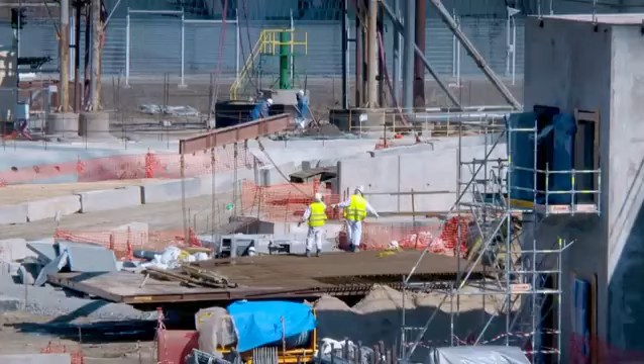Today, in Ukraine, an international team of engineers is racing to assemble one of the most complex superstructures ever built. It's the largest structure that will have moved on land, an extraordinary 36,000-ton, £1.2 billion megadome. Its job: to entomb the crumbling remains of the Chernobyl nuclear reactor.

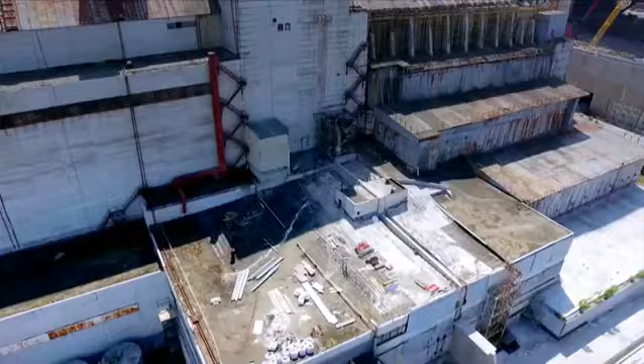The shell of the nuclear reactor is collapsing. Engineers must battle to stop another escape of deadly radiation. It's extremely dangerous - everything we touch, everything we do is completely crazy.

Fighting freezing weather and lethal radiation, this is the inside story of the race to build Chernobyl's mega-tomb.

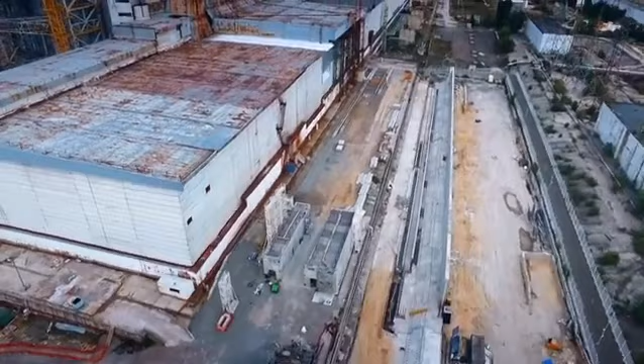These are the world's most uncomfortable boots, but I think they reserve these just for occasional visitors.

Simon Evans is one of the world's most unusual bankers. He's overseeing the funds for a project that will clean up and make safe one of the most deadly places on Earth: the Chernobyl nuclear power plant in Ukraine.

If you spend too long in some parts of this building, the radiation will kill you. Don't stop, don't stop.

We're in the control room of Reactor 4, where just over 30 years ago, they conducted a safety test on the 26th of April, 1986, and it went catastrophically wrong, and the consequences we're all too familiar with.

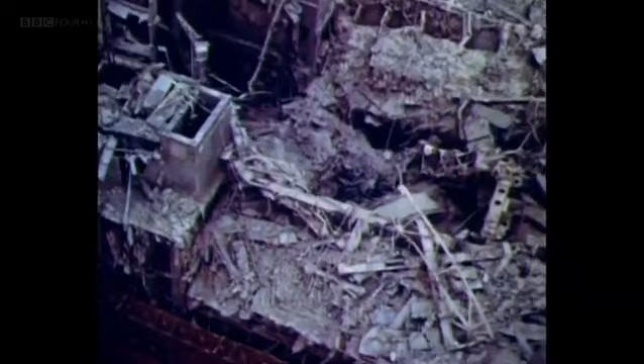At 1:23 in the morning, inside this Soviet-built reactor, a runaway nuclear reaction created a massive steam explosion. The blast killed 2 workers and blew radioactive uranium fuel onto nearby buildings. Radiation coming from this and the destroyed reactor killed a further 28 people.

Soviet authorities have been trying to downplay the incident, claiming that there are only 2 dead and only 150 injured. Reports coming out of the Soviet Union confirm that a cloud of deadly radiation is being released.

The explosion sent 50 tons of nuclear fuel high into the atmosphere. The wind blew it across Europe. Where it settled, it contaminated both the land and animals.

In the UK, sheep reared in parts of Wales and Cumbria were declared unfit for human consumption.

Close to the reactor, the radioactive fallout forced 250,000 people to evacuate their homes, never to return. It was, and remains, the world's worst ever nuclear disaster.

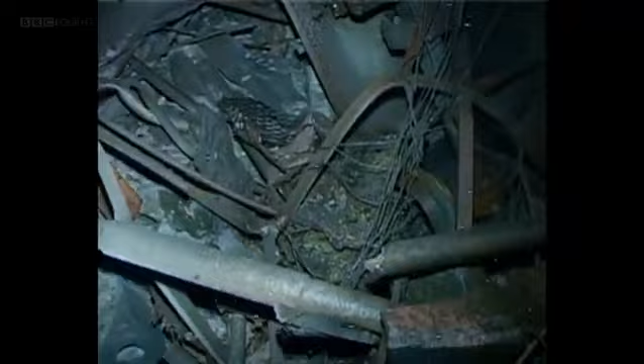After the dust settled, the Soviet authorities faced a monumental problem. Over 200 tons of radioactive material remained inside the damaged reactor building. Left unchecked, wind would blow the radioactive dust into the air.

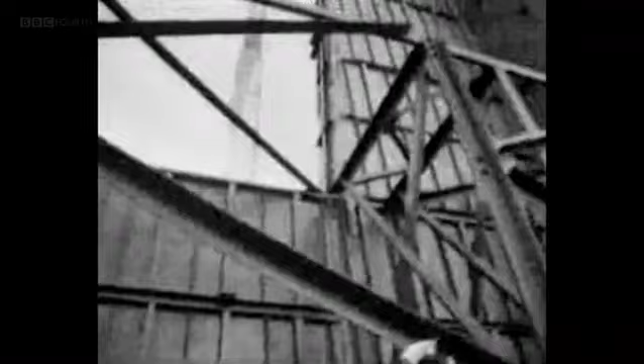Over the next 6 months, workers battled extreme radiation to seal the reactor inside a 300,000-ton shelter made from steel and concrete. It was called the sarcophagus.

Once it was complete, the world breathed a sigh of relief. Everything seemed safe.

But the engineers who built the sarcophagus knew it was a temporary fix. Today, 30 years after it was built, the shelter is falling apart.

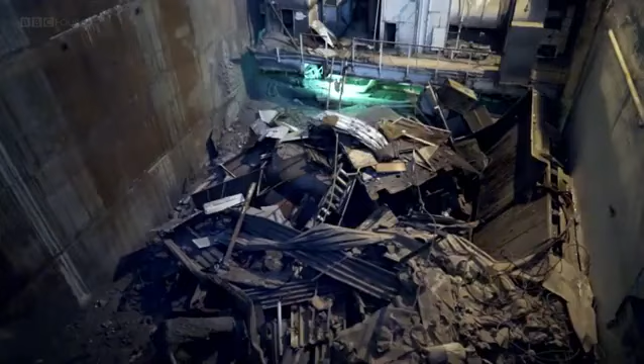This equipment monitors the stability of the existing shelter, which is absolutely essential to ensure that we know precisely what's going on here. We know that it's way beyond its design life. It's crumbling. We've already had a collapse from one part of the turbine hall about 2.5 years ago with a very heavy snow load, and saw some very, very major structural damage there.

This is the most radioactive area, the hall that once contained the reactor.

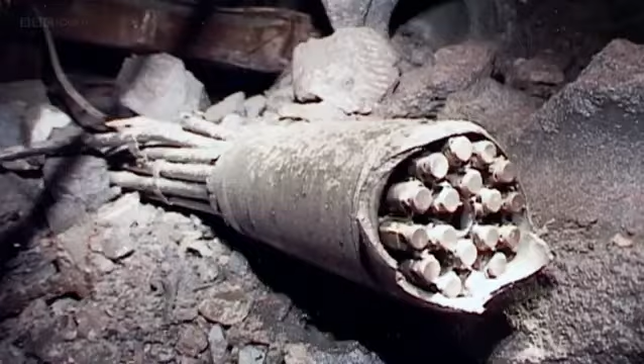The remains of nuclear fuel rods and the molten core of the reactor give off so much radiation that visits here are limited to seconds. Holes in the roof are clearly visible.

The collapse of the shelter itself over the old reactor hall is the apocalyptic scenario which we must avoid. Certainly it would release another major release of radiation into the environment. The sarcophagus is a toxic time bomb.

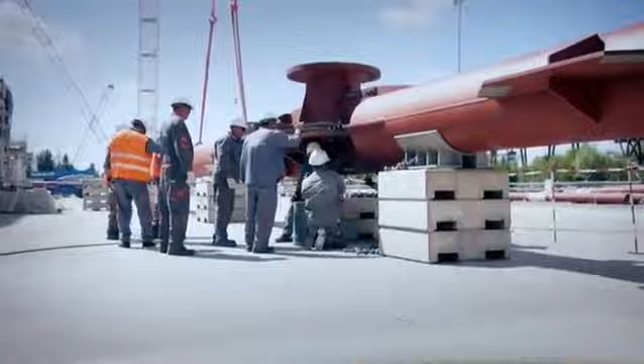So they have devised an ambitious scheme to build a new shelter to one side of the reactor, then move it into position. This is their grand plan.

300 meters away from the reactor, where radiation levels are low enough for builders to work normally, they will construct two halves of a giant steel arch, taller than Big Ben. They will mount them on two concrete runways, running either side of the crumbling sarcophagus, then slide the two halves together to make one enormous structure.

Inside the ceiling of the arch, they will attach two giant robotic cranes. Next to the reactor, they will construct a nerve center to provide the power, ventilation, and control systems for the arch. Once complete, engineers will slide the vast arch over the reactor. It will be the biggest structure ever moved across land.

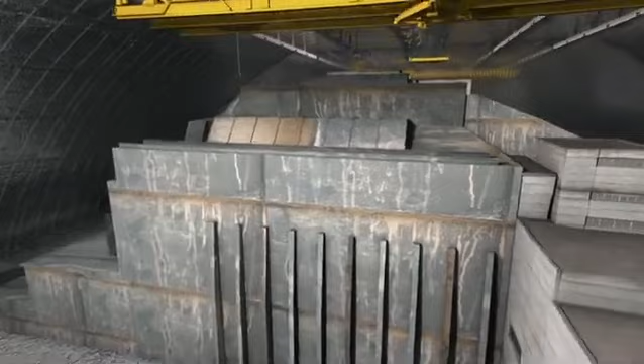Over time, the remotely controlled robot cranes inside the arch will dismantle the old sarcophagus and remove the remains of the exploded reactor, making the site safe.

It's a trailblazing scheme that will cost more than £1.2 billion. It will be funded with grants from countries all over the world. We're not really a normal bank. We have over 40 international donors supporting our work, representing the fact that it was an international accident and it's an international solution to that problem.

Since 2010, up to 1,200 people have travelled in to work at the Chernobyl site each day. The ambitious project has attracted an international team of engineers.

When you have the choice between building a tunnel in Miami or an arch in Chernobyl, it seems strange to choose to go to Chernobyl. It's a complicated project because it's difficult to understand each other.

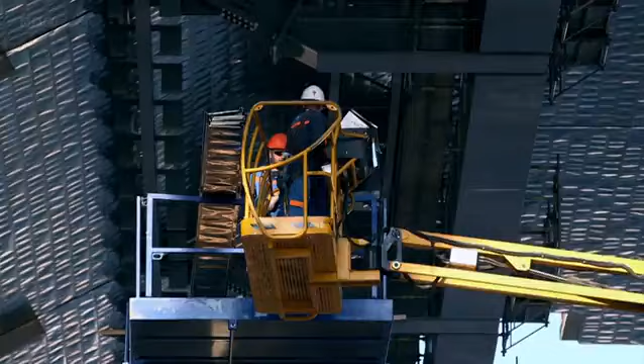It's hard to find somebody who hasn't heard of Chernobyl. You know, my kids, when they talk about what their dad does, they're like, oh yeah, that's a pretty special project. I had a very nice agency call me and they asked if I was interested in Chernobyl. And I laughed and said, you're having a joke with me. But after a few conversations, I realised they were being serious. And I thought, this is a challenge.

The first stage of the operation is to construct the arch in two halves. The frame will be made from 25,000 tonnes of steel tubes, whilst the vast roof will be clad with stainless steel.

Ukraine's harsh climate will make building the arch a formidable challenge. The biggest problem we have is the weather. It's the biggest problem on here. For the winter period, we can lose 3 months, 4 months of the year.

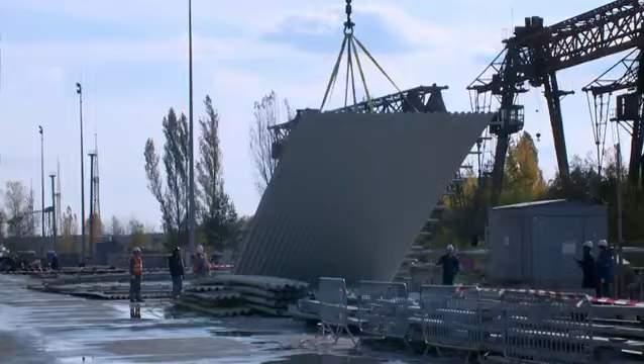Winter temperatures here can plunge to -29 Celsius. Today we have the wind problem. Yesterday we had ice on the roof, so we could not work. We lost a whole morning yesterday just through the ice on the roof alone.

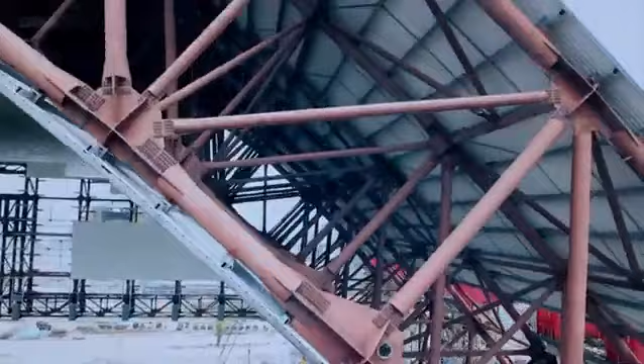Ian's team must work 109 metres above the ground - that's twice the height of Nelson's column. For this job it's extremely dangerous. The winds, the rains, make the surfaces we're working on very slippy. The roofers are all trained rope access technicians, but in these conditions, a momentary lapse of concentration could be fatal.

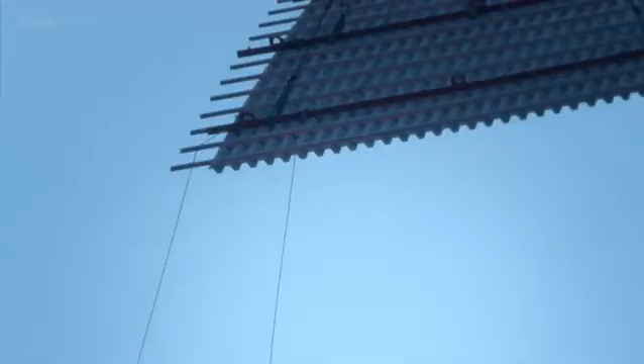Some of the materials that we're using can act like a kite, if you like. You can imagine a sail in the air, and the material is razor sharp, so it's very, very dangerous. So yes, we have to be very, very careful.

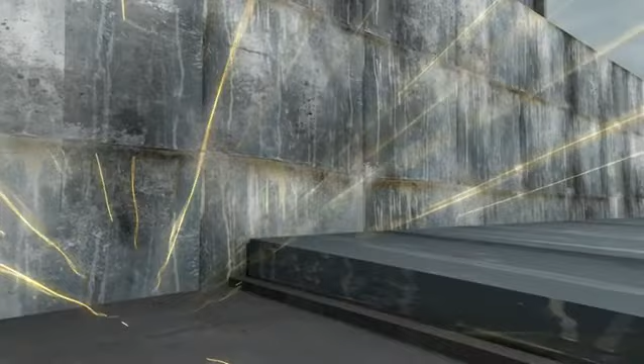The extreme weather and heights aren't the only risks that the team must battle. Radiation is still streaming from the melted uranium fuel in the destroyed reactor. The uranium fuel gives off radiation in the form of gamma rays, high-energy photons. Some of these pass through the walls and stream out into the surrounding space. Most pass straight through a human body, but some interact, damaging cells and fragmenting DNA, which can cause cancer.

The dangers are very real. Back in 1986, when the Chernobyl reactor exploded, the blast blew open the pressure vessel holding the uranium fuel. This exposed workers and firefighters to high levels of radiation.

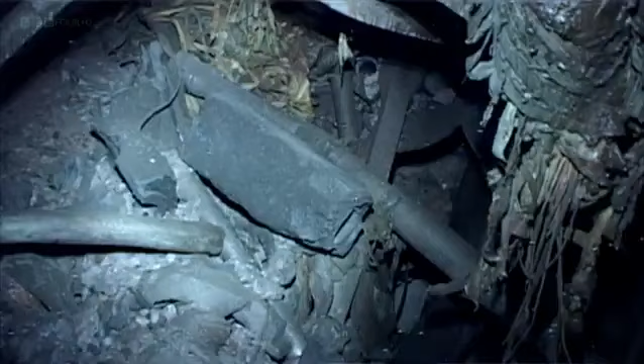Today, at the Chernobyl plant, the danger of radiation still exists. 95% of the uranium that was in the reactor before the explosion is still there.

Close to the reactor, the high number of gamma rays makes it too dangerous to work for the long periods of time needed to construct the arch.

But the engineers have one thing on their side. As the gamma rays leave the reactor, they get further apart from each other, and some are absorbed in the air. So for every 1,000 gamma rays passing through a person standing 30 meters from the radioactive source, only about 1 will pass through a worker standing 300 meters away, where they're building the arch.

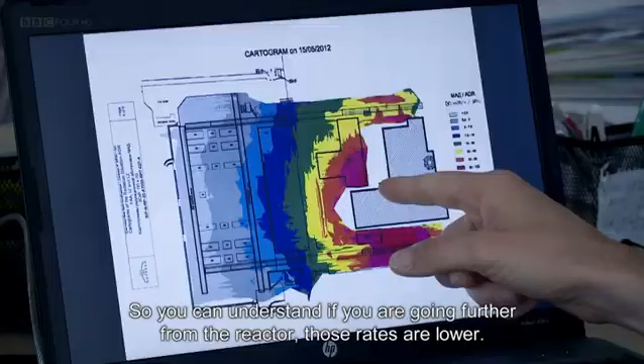Radiological engineer Nikola Gilcher measures the radiation across the site. You can see here reactor number 4, which was damaged in '86, and at about 300 meters from the reactor, the platform where the arch will be built. So you can understand that the further you go from the reactor, the lower the dose rates.

A special unit checks the daily amount of radiation every worker receives. We provide everybody with dosimeters. I have the French national dosimeter, I have the Ukrainian national dosimeter, and then we also have an electronic dosimeter that is our operational dosimeter. The dosimeters ensure no worker receives too much radiation.

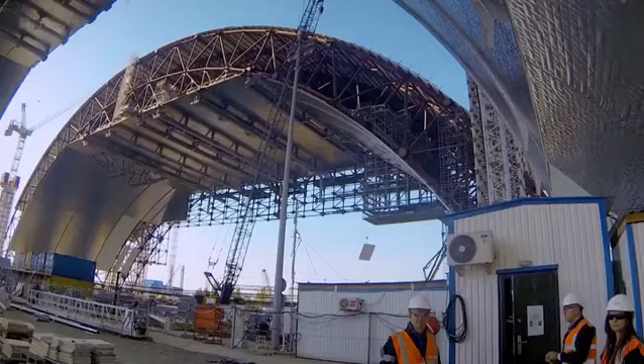There's one further challenge that makes this already complex project even tougher: time. The crumbling reactor to their side could collapse at any moment.

In June 1986, two months after the disaster, Soviet engineers began building the sarcophagus to enclose the ruined reactor. The plan required 400,000 cubic meters of concrete to buttress the damaged walls and giant steel beams to support the roof.

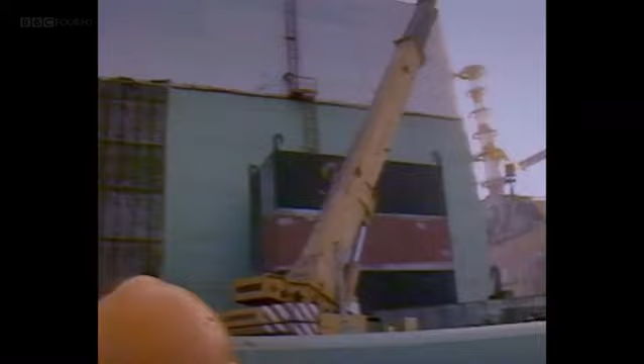But the extreme radiation made it impossible to build the sarcophagus to normal engineering standards. We had no time. It was necessary to install the sarcophagus without welding, without bolts. The whole sarcophagus rests only on weight, that's all.

The sarcophagus had no proper foundations. It simply rested on the ruins of the destroyed reactor. Even as they built it, engineers knew its days were numbered.

We had no clear vision, no clear understanding of the condition of the former structure. The foundation was destroyed. So when we completed the sarcophagus, we decided that its real lifespan should be no more than 30 years. Now the 30 years are up.

If the roof of the sarcophagus collapses, it will throw radioactive dust out into the atmosphere, where the wind could blow it towards the construction site. If a worker inhales a radioactive fragment, it could stay in the body, releasing radiation that could cause cancer.

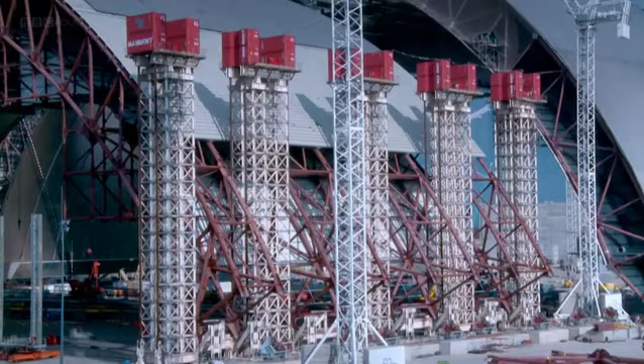Everything on this field is huge, it's enormous, you know. We don't have small things. Everything we touch, everything we do is completely crazy.

Nice to hear this noise, huh? It will take 40 huge jacks to raise this metal monster. That's going to be very tight, that's for sure, but we'll see.

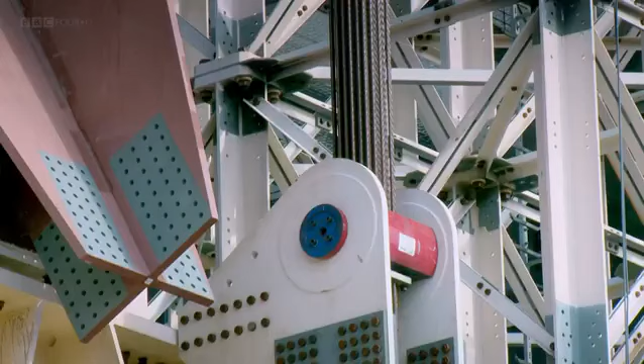Good start, so we have to try to reach the target of finishing the jacking today. Quickly, quickly, 7, 8. Yes, 5 millimeters.

Okay, let's continue, very quickly, go. Okay, perfect, okay.

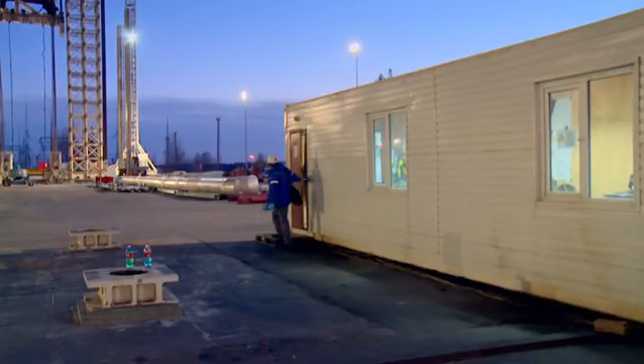Success. But the team can't afford to kick back and relax. If the sarcophagus collapses before the arch is in place, the fallout would contaminate both the arch and worksite, undoing years of work clearing up the radioactive debris from the original disaster.

It's a nightmare scenario, and the people here know better than anyone what the effects would be.

Two miles from the reactor lies the abandoned city of Pripyat. 50,000 people once lived here, many of them workers at the nuclear plant.

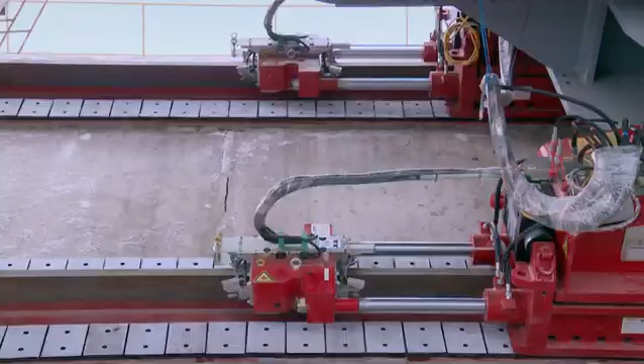Okay, so we will start skidding now. It will take 56 pairs of hydraulic pistons and over a megawatt of power to pull the arch together. Such a system develops a huge force, that's crazy.

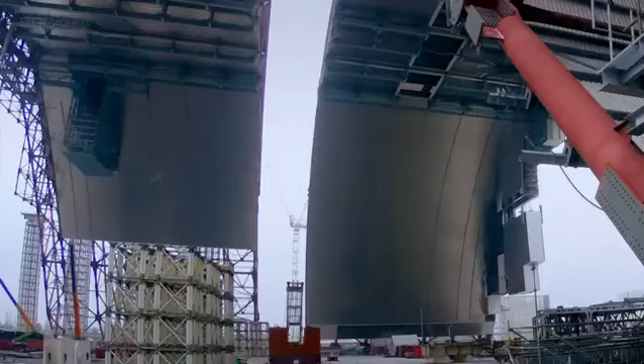So we have arrived, we can say it, yeah. The two parts of the arch are finally one. It's a major moment. For the first time, it's possible to see the vast scale of the new shelter.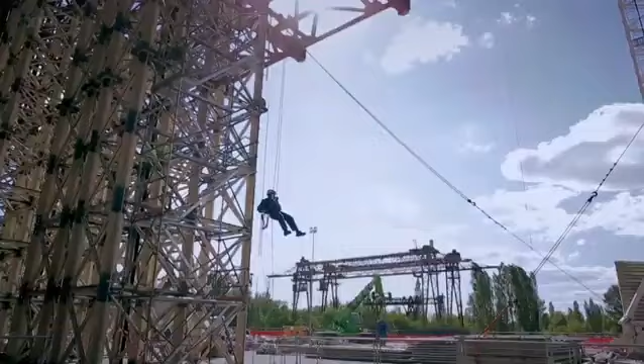Right now, it may look like nothing more than an empty hangar. But before they slide the shelter over the reactor, engineers will transform it into a living, breathing machine designed to tackle Chernobyl's long-term problems.

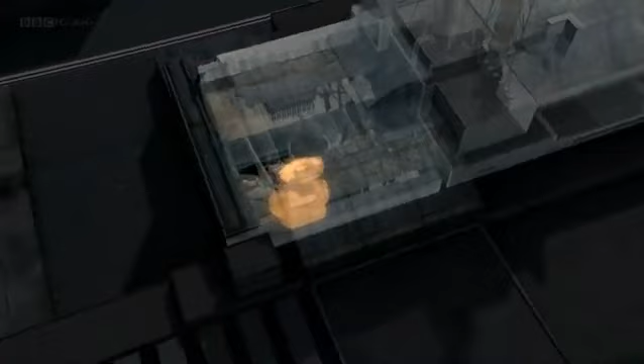The radioactive debris inside the reactor will remain dangerous for at least 20,000 years. If engineers simply covered the reactor with the arch and did nothing else, they would only be adding to the problem.

In time, many years from now, the arch would collapse. And a future generation would need to build another, even bigger one to keep the reactor safe.

To stop this happening, engineers must fit out the arch with trailblazing equipment designed to clear up the destroyed reactor. Nicolas Caille is in charge of constructing the new shelter. We have to provide tools to enable the deconstruction. We have to remove the sarcophagus built by the Russians.

So first of all, it's to remove the roof over the exploded reactor, and then after they will have to break the concrete and at the end remove the fuel in the heart of the reactor. It will take a long time.

Our arch is warranty for 100 years. So at the maximum, at the maximum, they can take 100 years.

No one has attempted to dismantle an exploded nuclear reactor before. Radiation makes the job too dangerous for people.

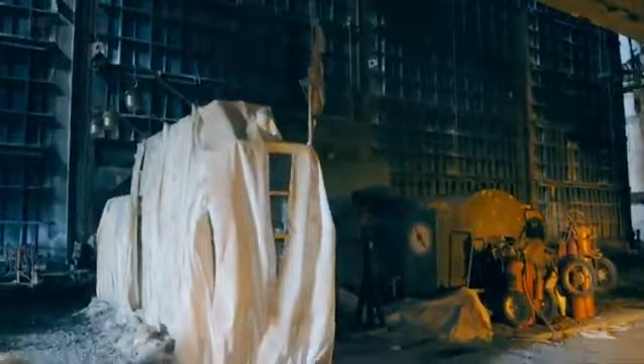The fuel that was there is still there, but when they start to dismantle it, you're going to expose that fuel. And as it gets exposed, the level of radiation will get much, much higher than it is today.

Rob Owen leads the team building a special robotic crane that will dismantle the reactor from inside the shelter. It uses an ingenious system of wires to carry a platform holding a robotic arm.

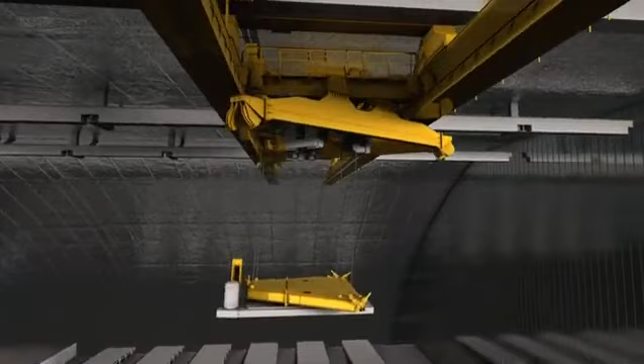The arrangement of the wires is crucial. If the platform was supported by vertical wires, it would swing. But using 3 pairs of wires arranged in triangles and adding a heavy weight makes it rigid.

It's not perfect. A strong side force could move the platform and slacken some of the wires. But if the weight on the platform is heavy enough, all the wires will stay tight and the platform will remain rigid enough to hold the robot arm that will dismantle the sarcophagus.

We kind of had to really go back and study the design. Would it work here? Could we make it big enough?

It had to be considerably larger than anything that had ever been built. But the idea was really intriguing because of all the pluses.

To drill into walls or pull a beam, the robotic arm needs to be able to push and pull horizontally. We have the 6 wire ropes and a lot of weight here that you can see on the bottom. All the cables remain in tension. It provides that stiffness that allows you to do pushing, pulling.

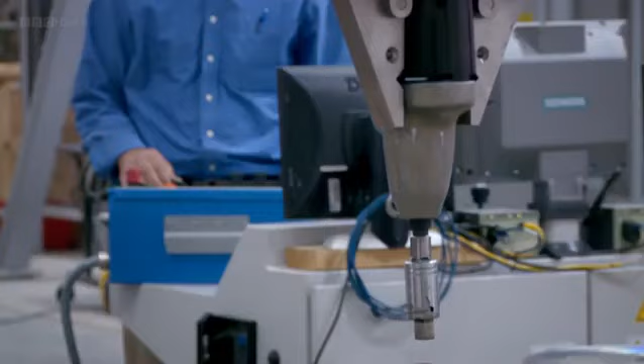This quarter-scale model demonstrates that the concept works. But the only place large enough to test the full-size crane will be in the arch itself.

Summer 2015. In less than 16 months, the team must slide the arch over the reactor. But there's yet another major job they must complete before that deadline.

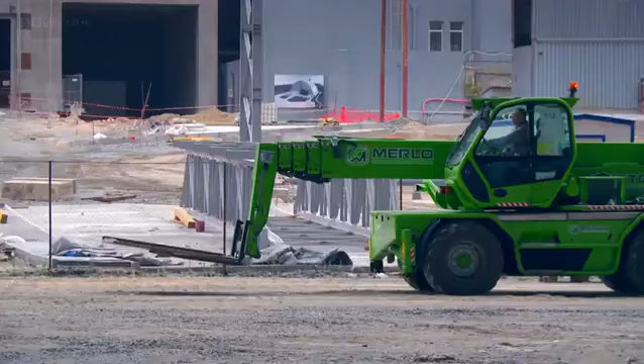Right next to the reactor, they must build the nerve center that will house the control systems for the arch, and where trucks will collect the broken down pieces of the old reactor. It will be the entrance into the arch, so the truck can enter below the arch, and all the waste or the deconstructed material will go through that building, out of that building, to be stored somewhere else.

The real challenge is the location. It's just 10-20 meters from the exploded reactor. This area is so close to the reactor that builders must wear extra protection, and working hours are limited.

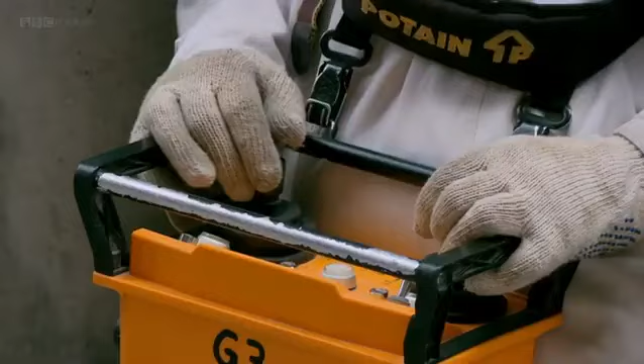It's too dangerous for people to work inside the crane cabs above the reactor, so operators drive them by remote control from the safety of concrete sentry boxes.

I don't think 30 years ago there was a word in construction for safety. It's increased by tenfold, 100-fold. Safety is much more important than it was before.

Back in 1986, the priority was to clean up the disaster, and people paid a heavy price.

After Chernobyl exploded, it burned for 9 days, spewing radioactive dust onto the surrounding countryside. The Soviet authorities declared a 30-kilometer radius exclusion zone around the reactor. They drafted in 350,000 people to clean up the radiation. They were called liquidators.

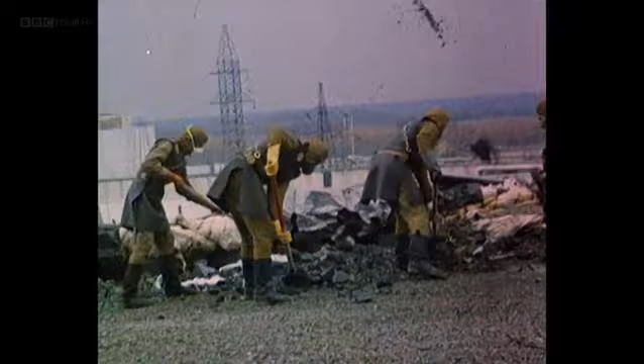At the center of the zone, they cleared the radioactive debris from the roof of the exploded reactor. Here, some only had 45 seconds to perform their task before their dose of radiation became too great.

In the surrounding area, they washed down surfaces to remove the radioactive dust. They bulldozed and buried the most contaminated homes, along with over 1 million tons of contaminated soil and machinery.

Among the liquidators was Ivan Martynenko.

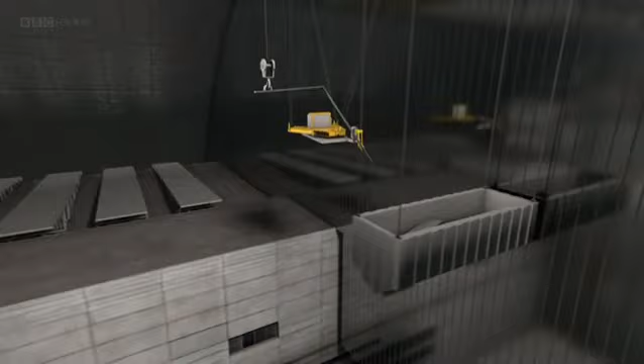It will take decades for the remote-controlled cranes to dismantle the damaged reactor and dispose of its radioactive waste.

This creates another major design challenge for the engineers building the arch. It must last 100 years, but the metallic structure cannot last 100 years on its own. You have to protect the structure and repaint it.

I mean, as a French, I take the example of the Eiffel Tower, which is repainted every 7 to 10 years.

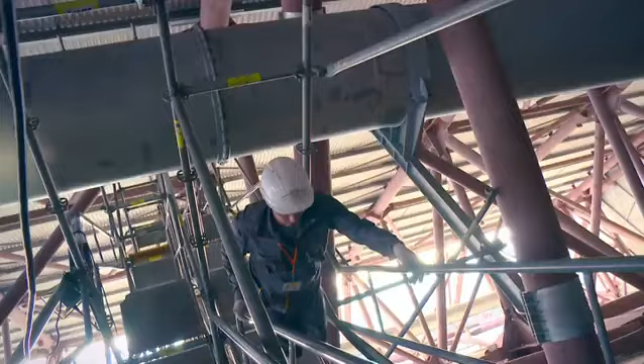Moisture in the air will cause the steel to rust over time. Painting the steel protects it, but it will be impossible to repaint the steelwork once the arch sits over the reactor.

As you can see, the steel structure has been painted in the factory. This paint will last 15 years. Unfortunately, we will not be able to renew it once the arch is in final position, because the radiation conditions at that location are too severe for a painter.

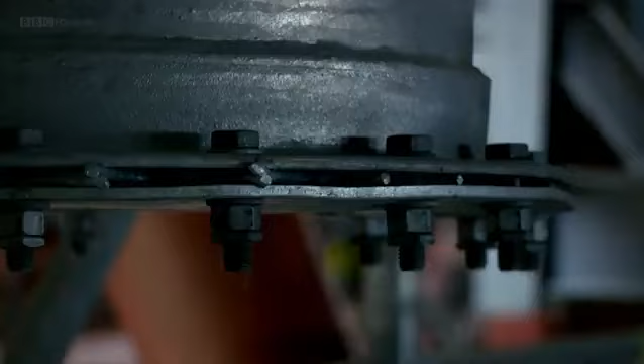But left unpainted, the arch will corrode. To solve this problem, they're engineering the arch to be an ingenious, breathing structure.

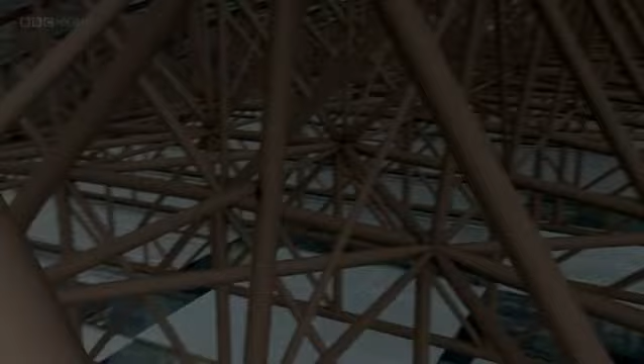The gap between the arch's exterior roof and interior ceiling will be airtight. This creates a vast enclosed space around the steelwork.

Powerful fans will suck in air from outside, channel it through massive dehumidifiers to remove moisture, then blow the dried air along 3.5 kilometers of aluminium ducts into every corner of the enclosed space.

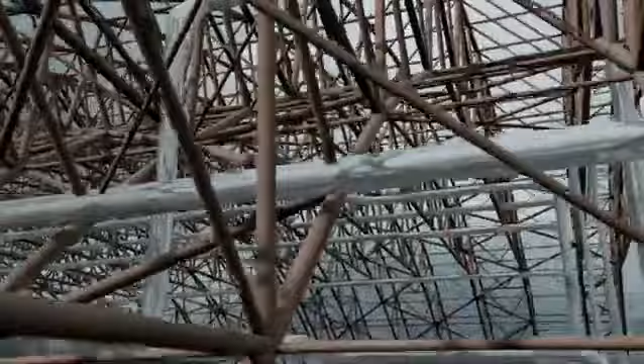The ducts will constantly recirculate the dry air to make sure that the atmosphere in the enclosure remains dry, so the steelwork doesn't rust.

For the ventilation to work, the interior ceiling must be airtight.

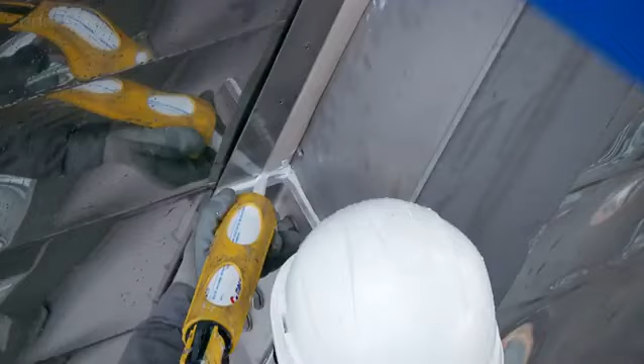We have some junctions here, so because of this gap, we have to do a compressed sealant, which makes the air seal tight.

This cladding is stainless steel, and it's designed for the purpose of containing any airborne contaminated particles from escaping into the environment during the dismantling of reactor number 4.

Spring 2016. Before engineers slide the arch over the reactor, they must install the massive cranes 80 meters above the ground.

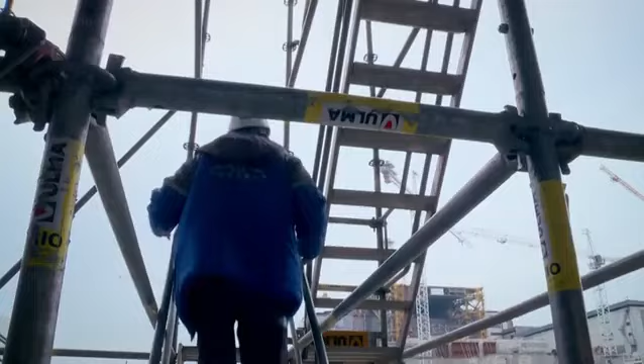Baptiste Brivois is the engineer in charge. Today, he has a 26-story climb to the control room.

The team is relying on 12 hydraulic jacks fixed near the top of the arch to lift the 800-ton crane into position. Inside the jacks, hydraulic jaws grip the wires attached to the crane and slowly hoist them up.

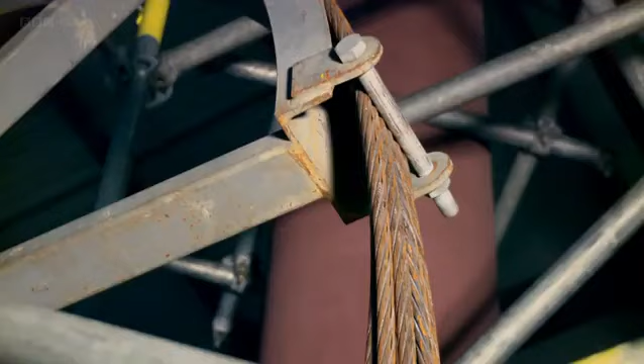It's coming closer and closer. I like it. But just as the crane lifts off, they hit a glitch.

Sorry. No, apparently we have a little problem with the strain carousel. The lifting wires are tangling. Down. I'll be there, back in a minute.

Working 90 meters above the ground, it's a precarious operation wrestling the wires back into place. It was very quick, they are very efficient, so we can still finish today.

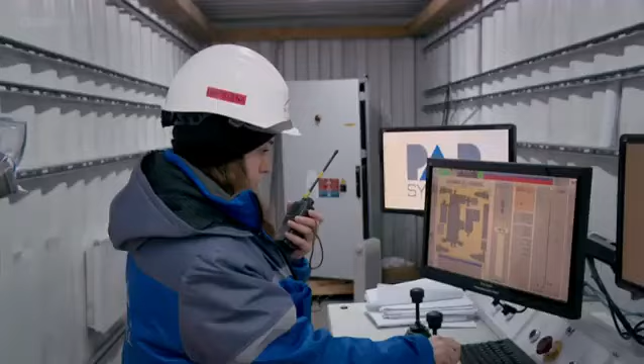Now, engineers can start tests on the full-scale crane. Now we can lift. Yes, we can lift, yes. Within the next few years, these cranes will start dismantling the ruins of the Chernobyl reactor.

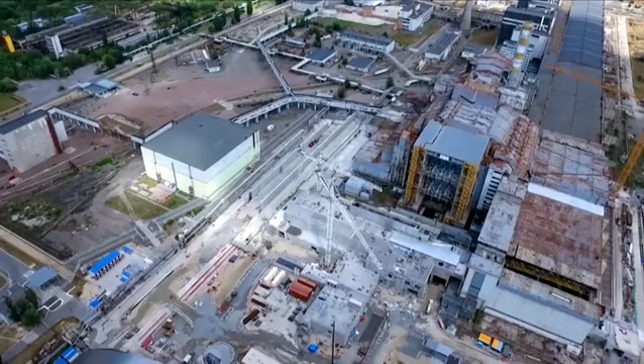It will be the final step in the long operation to make the site safe. But the reactor is only one part of a wider problem.

During the disaster, large quantities of radioactive material fell in the area around Chernobyl. A 30-kilometre exclusion zone was set up around the reactor. 30 years on, it's still a restricted area. But what does the future hold for this contaminated land?

Scientists make regular visits into the exclusion zone to study the effects of the radioactive contamination. Ecologist Mike Wood is investigating what types of animals live in the zone and if the levels of radiation affect where they live.

At the time of the accident, depending on which direction the wind was blowing and whether or not there was rainfall, you got different amounts of radioactive fallout in different parts of the exclusion zone. Mike is setting up camera traps in 3 different areas, places with high, medium and low radioactive contamination.

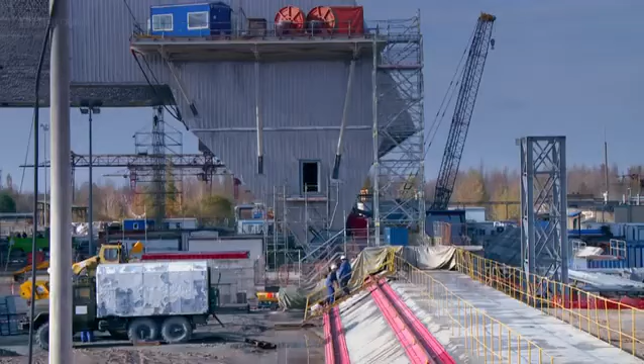November 2016. There are only 11 days to go before the team moves the arch. We're coming to the end. We're preparing for the skidding of the arch over the reactor. At last, this huge thing is built and it's going to move to where it should be.

For the engineers, this is the last chance to make sure everything works. There's a lot more activity because we now have many more tasks to complete, all in the same period.

One job is crucial before they slide the arch. They must open its enormous special doors. To stop radioactive dust escaping from inside the arch, its end wall must form a perfect seal around the old reactor building.

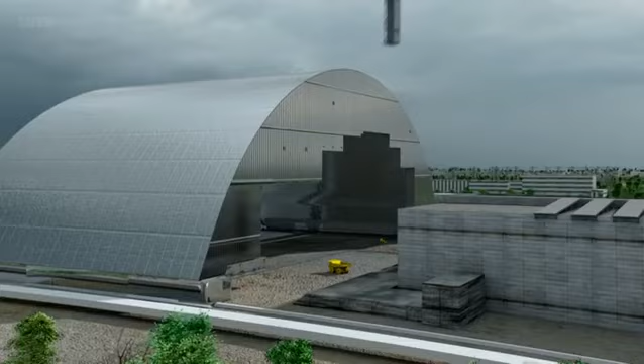But parts of the sarcophagus stick out, preventing the arch from sliding to its final position. So engineers have equipped the arch with tilting panels, like giant cat flaps, that they must raise and then lower into place when the arch is in position, sealing the small remaining gap with a flexible plastic membrane.

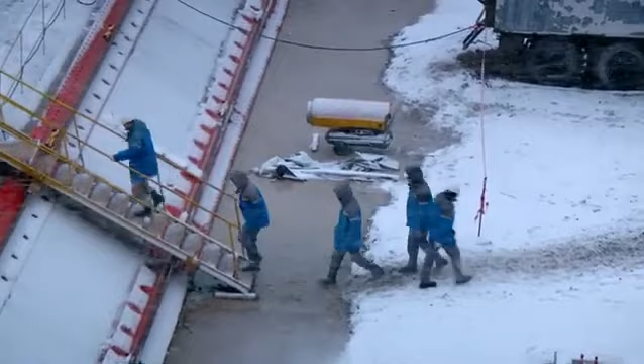Just as the team gets set to raise the heaviest panel, a winter blizzard strikes, threatening to shut down the operation. The icy temperatures could freeze the machinery.

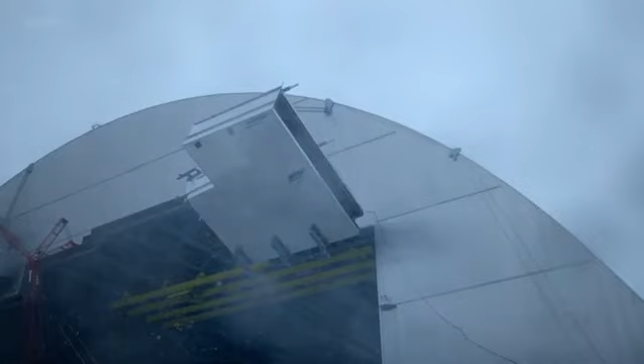We have 6 tilting panels, and the largest one is 320 tons. At the location where they will be located, it is not possible to send a person to close this tilting panel, to operate them. So we have designed a system of hydraulic jacks, a system of winches to close this panel remotely. It takes 4 hours to winch the massive cat flap open.

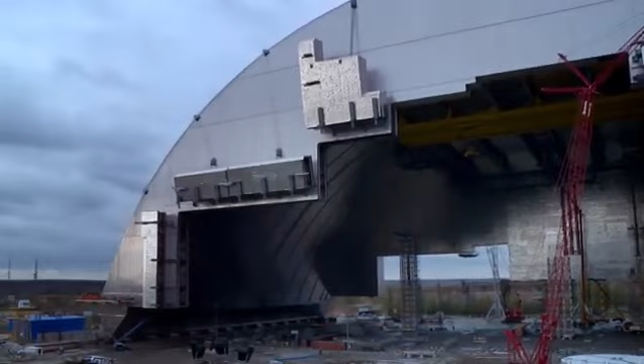Seven years after work began to build the 36,000-ton shelter, the day finally arrives when the team will attempt to slide it over the reactor. It will be the largest structure ever moved across land.

We are almost at the end. Yes, we are under pressure. It's a great challenge because of the size. I'm also thinking about myself. I already have a lot of white hair, and the sooner it's finished, the better it will be for me.

When you come here, you look at the distance between the reactor and the arch, and you're thinking, wow, this is going to be a couple of days' work. Moving this massive structure will be no simple task.

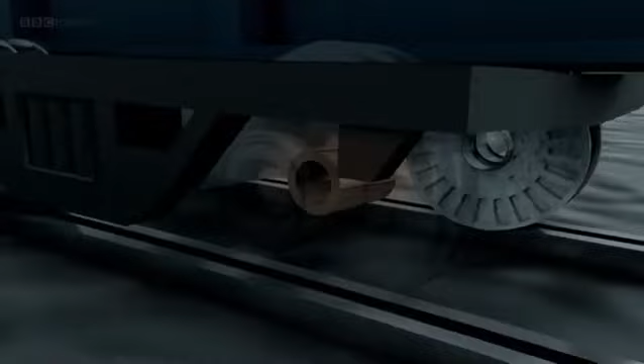The obvious way to move a monster arch would be on wheels. But that won't work here. The arch is so heavy that it would overload the wheel bearings, which would fracture, leaving the structure stranded.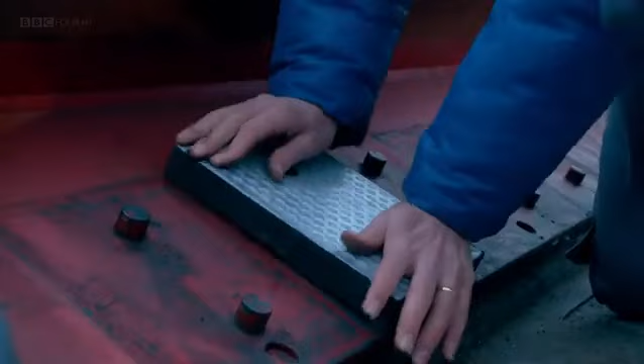So instead of wheels, engineers will use 116 steel feet, known as skid shoes. These will slide on Teflon pads placed on top of the rails. The typical example of a Teflon pad with the two holes in it. Over these knobs we put the Teflon pad, right solid. And basically, if you put a lot of them, you make your own sliding way for the skid shoes to slide on.

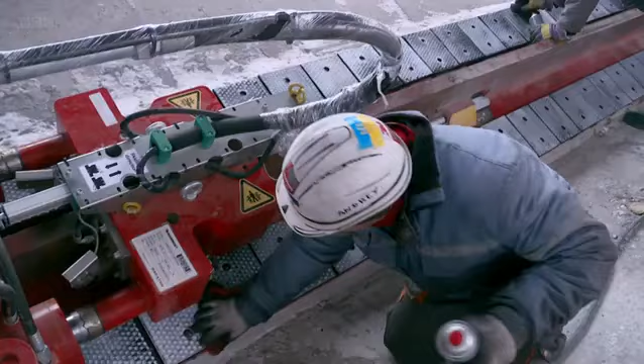This non-stick surface, also used on frying pans, will help the stainless steel feet of the arch to slide with very little friction.

To push the arch, engineers will fit each leg with hydraulic pistons. These move a pair of wedges that grip the steel rail. Powerful pumps will then extend the pistons to push the arch forward. More than 200 pistons must work in perfect unison to slowly slide the arch towards the reactor.

This is a one-off skidding. I mean, you can't go back. So you should be sure that you have not forgotten anything.

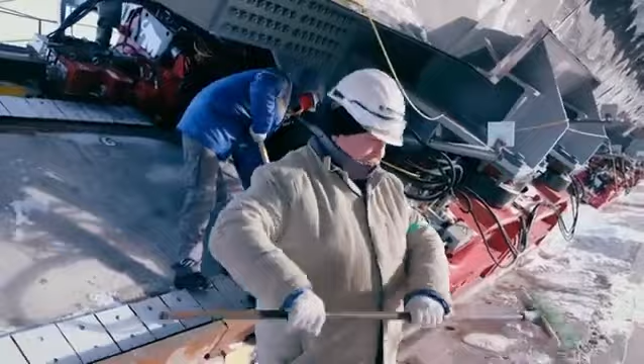This is the critical maneuver everyone has been working towards for 7 years. That's a confirmation that we are ready.

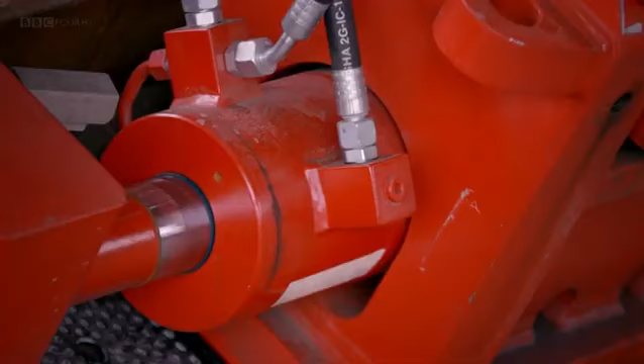We go. The pistons fire up. 2,000 tons of force pushes against the arch. And they're off. The vast structure, as heavy as 3.5 Eiffel Towers, slides towards the reactor at around 10 meters an hour.

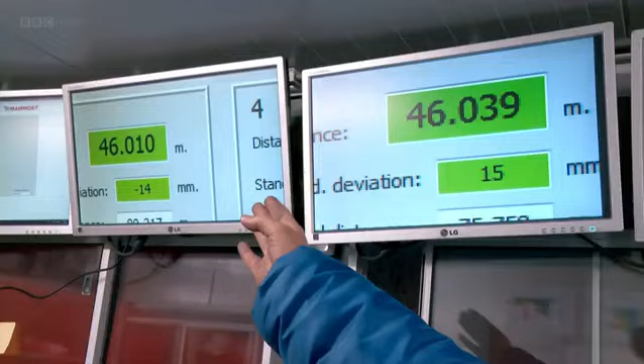It's crucial that both sides of the arch move at the same speed. If you move one side faster than the other, you will get bending in the arch, which can lead to damage. And if we go too far from each other, the deviation between the two gets too high, and then we have to adjust.

On the screen, all the upper skid shoes are the north. These are the south. So then we can select the upper skid shoes and move forward to correct the readings we get on the system. For the south, 383. Okay, thank you. Who is that?

Tim? That's the difficult part. You get so much data and you have to act correctly and quickly.

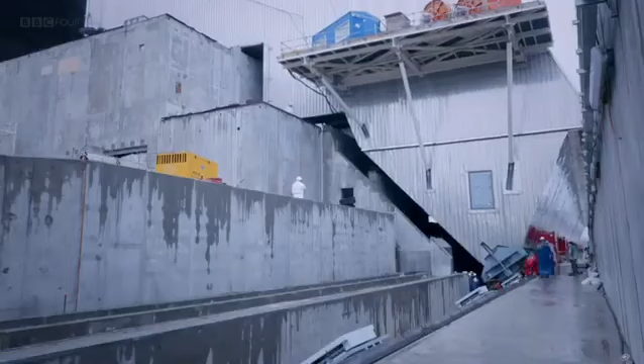The closer they get to the reactor, the more difficult the operation becomes. Sliding the arch over its walls will be tight.

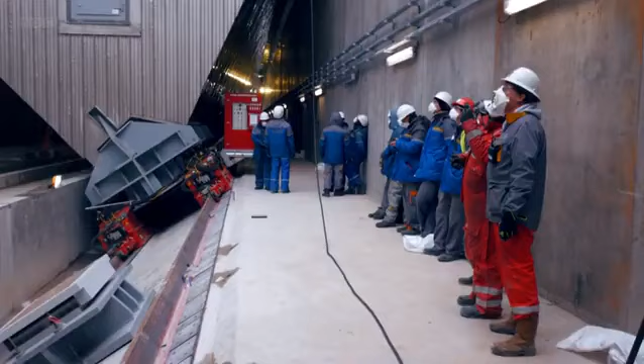People will follow the sliding itself of the arch. 80 to 90 people will be involved. We have a lot of watchmen because our clearance is very limited. The clearance that we have is quite tight. It's 50 centimeters.

What could go wrong during the skidding? Nothing. Everything should be fine. But just as the arch approaches the reactor, they run into trouble.

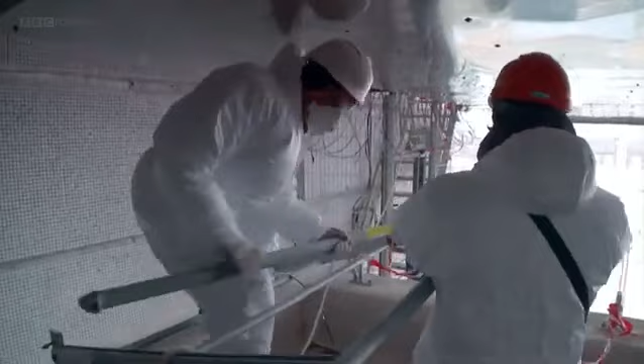It gets caught on a barbed wire fence. The radiation here is high, so they must act fast. There are two rebars touching the arch, so we are sending somebody with a saw to remove these rebars, to be sure that we are not damaging the arch.

With the wire removed, there's one last task before the final push. They must lower one of the panels, or it could jam on an old chimney.

If the arch is too close to the end, it will hit the chimney. So we have to tilt it before, and then we can restart until the end and finish it tonight. Oh, Vitaly! Yes! Go, go!

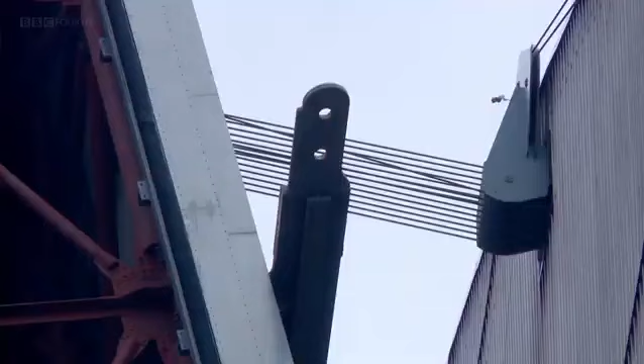The panel clears the chimney. And the final push begins.

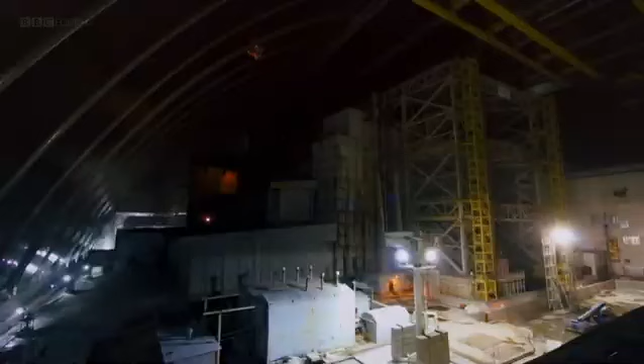After 33 hours of pushing, the arch is finally in position over the reactor. It's a feeling of pride. We achieve something great. It's a big step for safety. And Ukraine and Europe will be much safer now.

It has taken 18 years of planning, 7 years of construction, and a unique international collaboration. But 30 years after the world's worst nuclear accident, Chernobyl is finally a much safer place for generations to come.